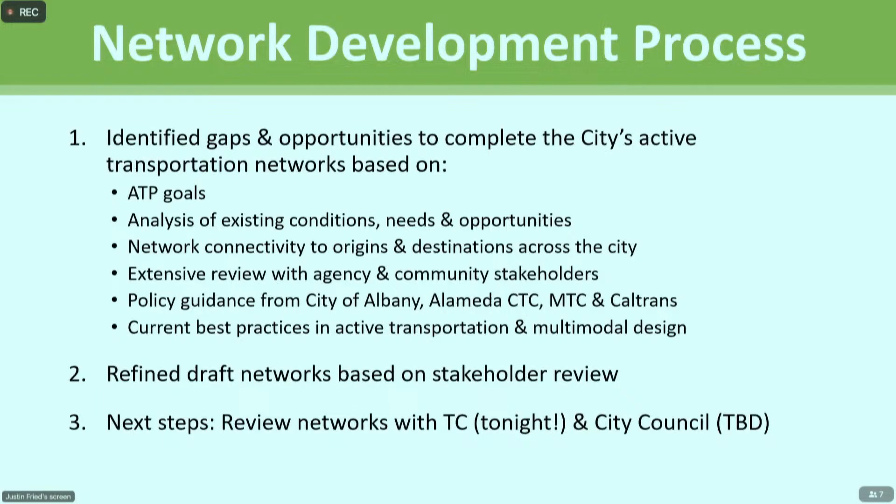I think I said more than I was intending to on that slide, but I felt like I needed to explain the big picture a little bit. So when we looked at the network development, these were some of the focus areas we really wanted to focus on, looking at the current active transportation plan and trying to take it to the next level.

So we want to improve the comfort level, and comfort's a word you're going to hear a lot. It's really a great way for us to measure the experience for biking and rolling, and for pedestrians and walking.

Specifically, we heard a lot of comments on the north-south streets, specifically the bike boulevards, some of those streets that we try to direct bikers to instead of streets like San Pablo. The east-west connections, so obviously north, south, east, west covers a lot. The school zones, especially the conflicts between pickup-dropoff with all the vehicles and then all the students trying to get there on bikes and walking. A lot of the major roadways, certainly there's a lot of conflict points, intersections especially.

One thing we really found was that the initial active transportation plan, not just in this city but all over, we've been doing this for about 15 years. In the beginning, we really focused a lot on segments, on lines and corridors, saying okay, we want to put bike lanes here, and that's great. In a lot of places we went ahead and did that. But the intersections are really where a lot of the conflict points remain, and they happen to be the most challenging too.

So what we really heard was, hey, the city's done a great job getting some of the lines down, but we still have to cross this street, and there's no way for me to cross it, even though the street is otherwise really good. But when I get to this intersection, the cross traffic doesn't stop, and what am I supposed to do? So we heard a lot of comments like that.

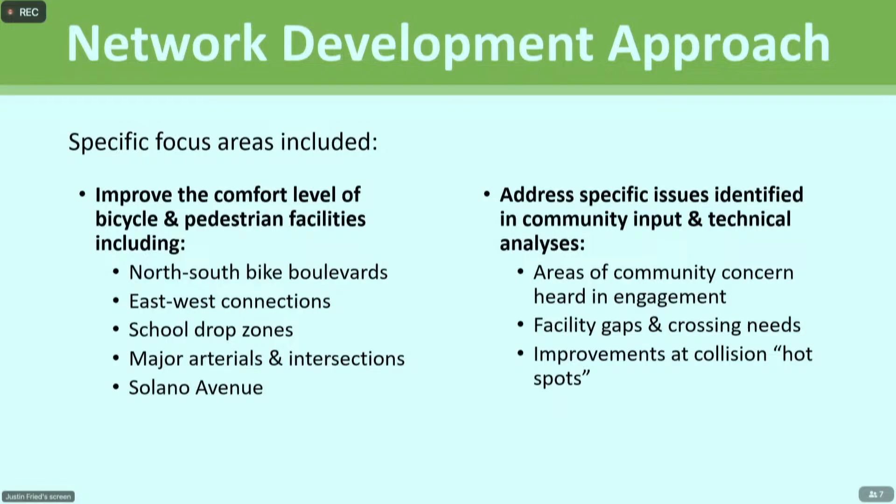What we're going to talk about here is more of the broader themes. Okay, next slide, I've got to keep moving here.

We put in the memo trying to keep it really simple and not get deep in the weeds. We want to walk through a little bit how the networks are structured here, and I'm going to turn it over to Angie to break it down a little more in terms of what it means and what those maps mean that were in your packet.

Okay, thanks Pete. Hi, I'm Angie Chan from Fehr & Peers. I'll be walking through the draft networks.

So the overall approach: we have our active transportation network, which is broken into our pedestrian and walking network, as well as our biking and rolling network.

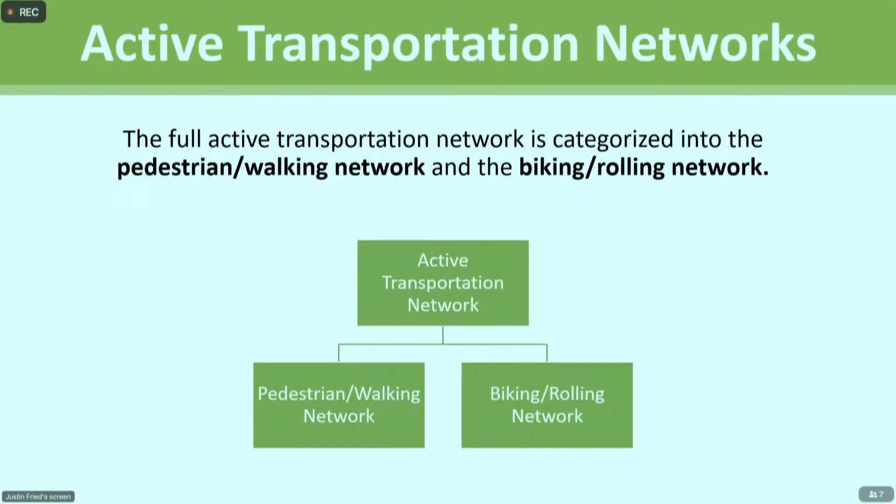So we developed this concept of nested networks for the ATP, and that helps us understand where to prioritize each mode. On the left-hand side, the pedestrian and walking network, the full network consists of all sidewalks, paths, and trails citywide. Pedestrians can walk anywhere there is a sidewalk or path, and that is the full mobility network for pedestrians.

Now within that, we have our high comfort walking network, where we have the highest levels of priority and treatment for people walking, and where we want to see the highest comfort. We want to make sure it's really, really safe and comfortable for people of all ages and abilities.

On the right-hand side, we have the same kind of concept for biking and rolling. You'll notice there's a designated biking and rolling network, but no equivalent for pedestrians, and that's because streets in Albany generally have sidewalks built out. Of course, there are issues with sidewalk obstructions, as well as places where the sidewalk width is not super ideal, but generally you can walk anywhere there is a street in Albany.

Whereas that's not the case for biking. Not every street in Albany has designated facilities, not every street is a bike route or a bike lane. So the designated network is everywhere there is a marked bike facility on the street. Now within the designated network, there's a priority or high comfort biking and rolling network, and this is where we want to get to the high comfort standard, all ages and abilities, which I'll talk about in the next few slides.

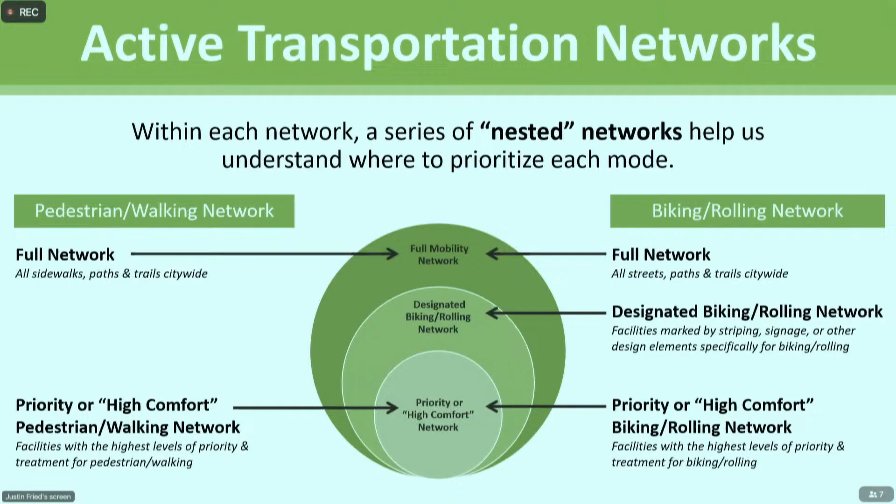So I know this body has talked about the concept of high comfort with the level of traffic stress, and recognizing that high comfort is kind of a subjective definition where some streets can be comfortable for some and not for others. But generally, there are treatments and standards that we can look to, to increase comfort for people walking.

And so we'll go over some of these treatments today. This is not an extensive list, but what we really want to focus on here, like Pete said, is crossings and conflict points, getting to a level of comfort at intersections, really separating pedestrians from potential conflicts with vehicles at these conflict points.

That can look like a curb extension, which reduces the crossing width for pedestrians, as well as treatments to improve visibility, such as an RRFB or a high visibility crosswalk to increase visibility for drivers, as well as median refuge islands to allow pedestrians a safe place to wait as they cross opposing lanes of travel.

There are also potential additional considerations that go into high comfort. Again, this is kind of more qualitative, things like sidewalk width, landscaping, lighting, other amenities that just make an overall attractive and comfortable pedestrian environment.

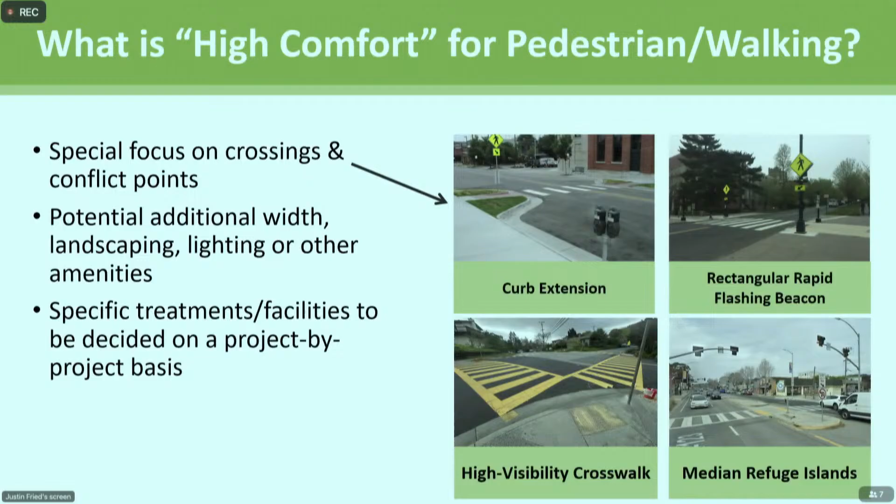Now for biking, there is a standard for high comfort defined by NACTO, all ages and abilities, and we would want to look to meet or exceed that. This is the new Urban Bikeway Design Guide, the new edition, which has this table for selecting all ages and abilities bikeways. I believe this commission has gone through some of this, but I'll walk through it again.

It's dependent on target motor vehicle speed as well as motor vehicle volume, both per day and also peak hour and peak direction. You'll notice on the top row that a protected bike lane is really acceptable as an all ages and abilities facility for streets with any vehicle speed and any vehicle volume. So that's a facility we can consider not just on our busiest streets, but on any street. But we also have other options.

We can have shared spaces, which is really targeted towards very low volume, very low speed streets, as well as bicycle boulevards, which are a little bit higher than that. And then we have advisory bike lanes, constrained bike lanes, as well as buffered bike lanes, which are acceptable for volumes under 3,000 for bike lanes, 6,000 for buffered bike lanes, as well as keeping speeds under 20 to 25.

We conducted traffic counts for this. The city does annual traffic counts, and we have a couple of new counts that informed our network development process. What we're seeing is that volumes are generally low on a lot of these corridors. There's still room for improvements with traffic calming and diversion, but speeds are generally a little higher than we'd want to see, higher than 25 miles an hour. We can get into that specific stuff later.

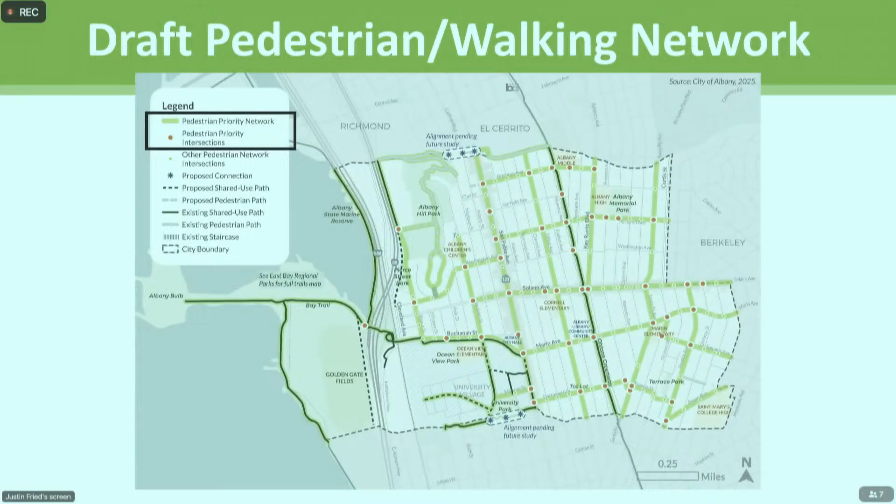Next slide. Now going into the draft biking and rolling network, this is also a place where we made some changes based on stakeholder feedback, which Pete will also go over when I hand it back to him.

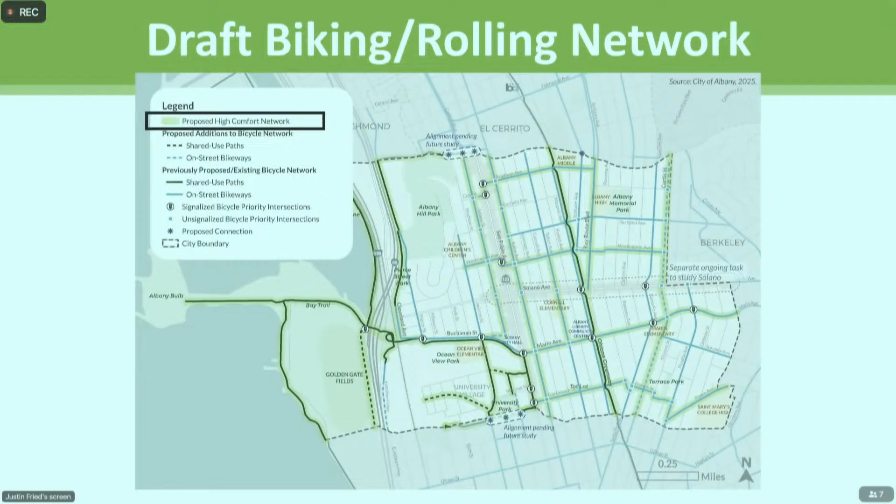Next slide. Okay, I'll bring it back to Pete.

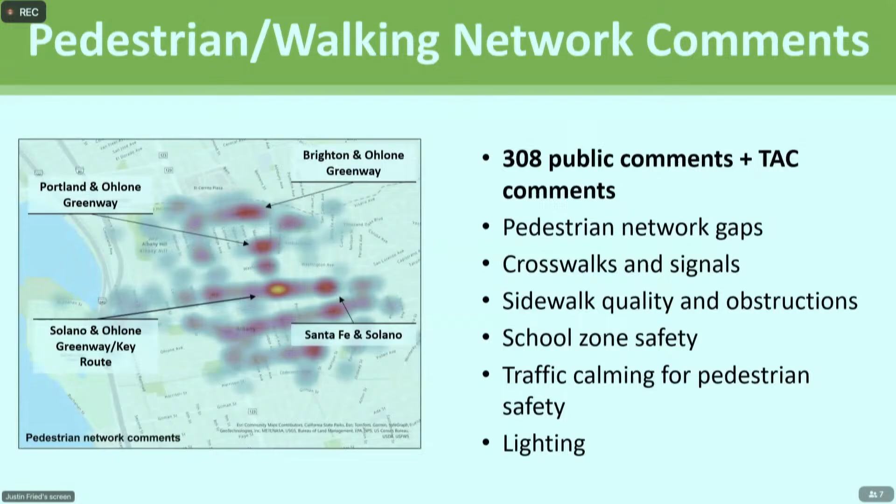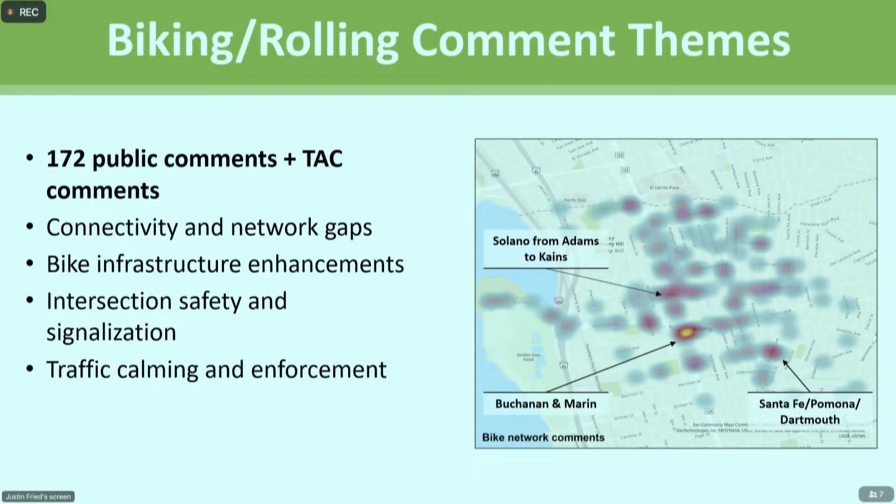Next slide. Again, Angie kind of walked through this — we assessed the feedback, we added some segments, we added some intersections. The comments were largely additive, which is a good thing. I don't think we really heard anybody say, oh, you've got to take that out. Usually most of the comments are additive. What that does is, in the end, create more improvements and more projects for the city, because every time we add a dot, that means we probably want a project there that contains a certain amount of improvements. And so that kicks the can down the road a bit, because then it becomes an issue of trying to prioritize these things.

If we just add more projects, it becomes kind of a wish list, and then we actually have to implement them. So in the third phase, we want to pull out the highest priority projects and define those a little more completely—design concepts, costs, and everything—so we can get them right into the city's CIP.

And then again, like I mentioned before, we got a lot of location-specific and facility-specific comments. We flagged all those, and they're in a mapped database, so when it comes time to look at a specific facility, we can draw a line around them and look at every comment we got about that.

Next slide. These are the items for further discussion—there are four of them. This isn't to say every other issue in the city is solved. As we go into the next phase, we'll look at some project-specific decisions, but here are some items about the network we wanted to tee up now and get your take on. For some of them we have a recommendation, but this is intended to be a discussion, and we want your input on these things too.

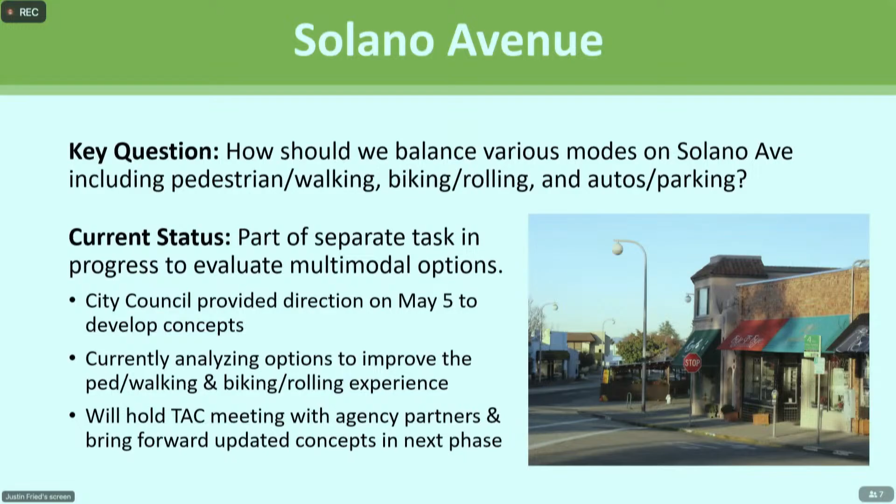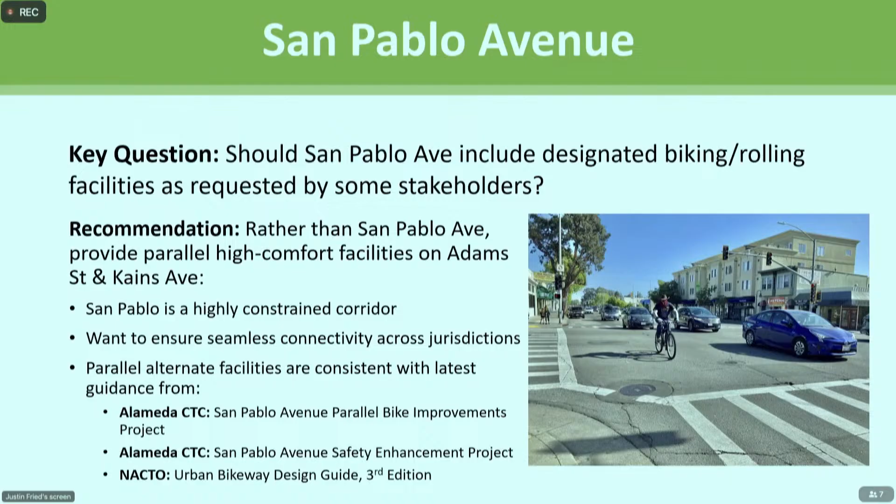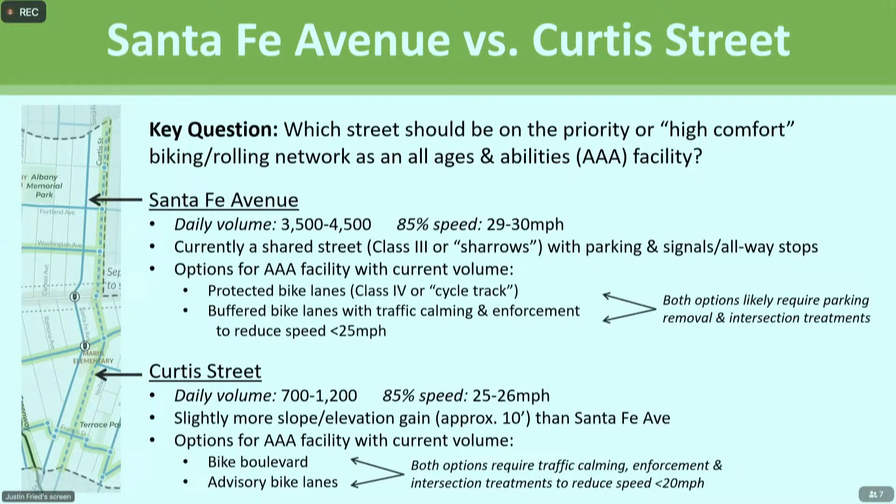So if we go to the next slide, I think we have some recommendations. For Santa Fe, it is a bikeway now, it's got the shared street sharrows, we would definitely recommend keeping it as such. It would be good to get the speeds down if we can. We heard a lot of comments about Santa Fe specifically, that it's kind of used as a cut through and it's kind of a speedway. So even if we weren't going to make it a fancy new bikeway, I think the recommendation definitely would be for traffic calming on Santa Fe, regardless of whether you do more things for bikes or not.

And then on Curtis, the recommendation is to develop that one as the all ages and abilities facility with either bike boulevard or advisory bike lanes. There's kind of two different types that could work there. That isn't necessarily something we have to decide now. When it's time to develop Curtis Street as an actual project, whether we take a close look at it at the end of this project or when it gets into the CIP and the city is able to do design and a lot of outreach just about that specific corridor, that's when we can make some of the decisions over which specific facility. But the fact that it's a shared facility and that we can achieve the all ages and abilities standard is kind of the key point.

Obviously there we would need to implement traffic calming and enforcement as part of that. And I definitely want to point out that traffic calming is not just an engineering solution, but also requires enforcement to try to get speeds below 20 miles an hour for a bike boulevard. And then again, as I mentioned, the intersection treatments. So there's no easy answer for some of these. There's obviously trade-offs in terms of cost and in terms of parking and speed and all those other things.

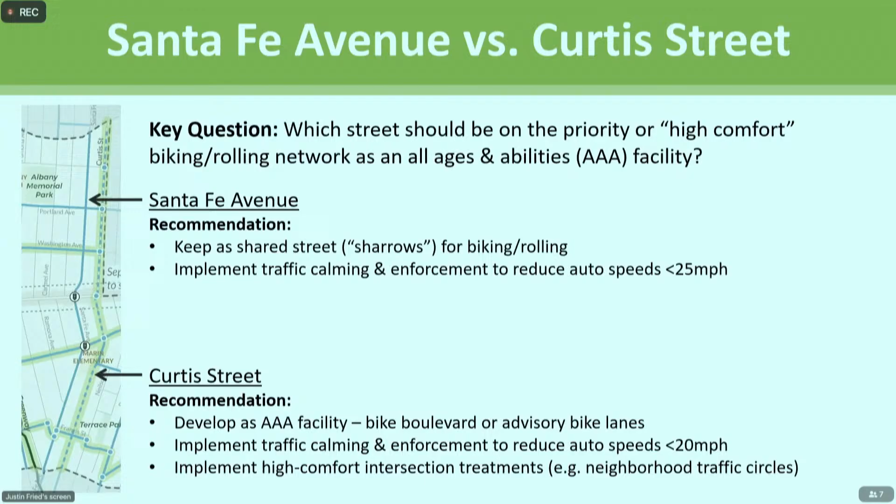But we definitely heard a demand for a north-south corridor in this part of the city, and definitely a lot of comments about Santa Fe being a little bit inhospitable for that. So that concludes this one, and there's only one more left. If there's no questions, we'll move on.

And connectivity is really important. What that really means, I guess, is being able to get to the places you want, but just in terms of developing a grid of lines and nodes that kind of reach every part of the city. And so in this part of the city, there's definitely a need for east-west connectivity.

Portland has slightly higher volumes, actually significantly higher volumes. It does have a school and a park right there, Albany High. And that's a tricky thing because the school and the park has a lot of active transportation demand. There's a lot of walkers and cyclists there, but that also creates a lot of auto demand for pickup and drop off at the school and for parking at the park. And so that kind of creates one of those streets where there's a lot of modes competing for a limited amount of space.

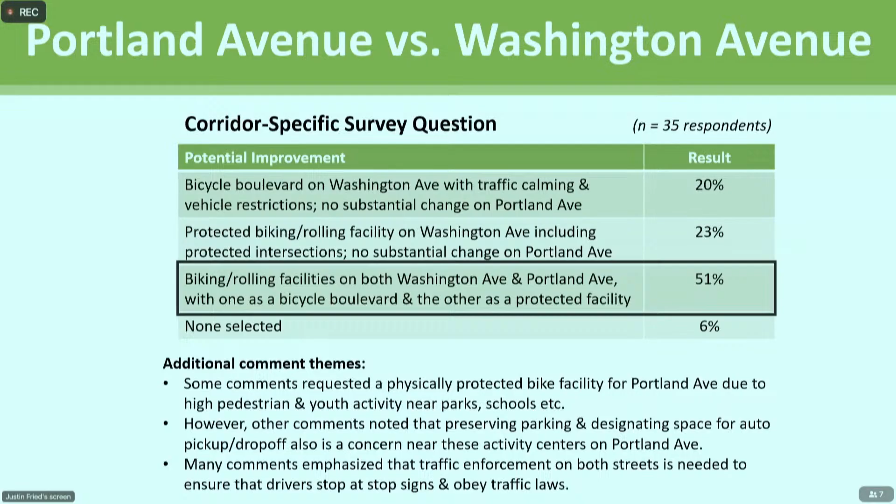Again, this is something we can discuss, and I think there's no perfect answer for it. But our recommendation, based on the information we've got so far, is to include Portland in the network as a bike boulevard, but not on the high comfort network. And it's right on the line there.

There is the all ages and abilities standard, but NACTO also has kind of a base standard for these things. It qualifies as a bike boulevard if it's got less than 3,000 cars, and they make the distinction that if it's got less than 2,000 and really low speeds, it could even be an all ages and abilities bike boulevard. That may seem like a wonky distinction, but when you're sharing a lane with cars and they're bearing down right behind you, the busier that street is, the more stress that causes. Because it's right on the line, and because we want to maximize what we can do, we felt it would be good as a bike boulevard with traffic calming and enforcement to get those speeds down.

Over on Washington, we were thinking that might be the better priority for the AAA facility, also as a bike boulevard. We went through lots of different options, but really to focus on high comfort treatments, traffic calming and enforcement. The volumes are right on the line, so we're thinking about the potential for some traffic diversion to get those volumes lower. But we know that can be somewhat controversial and cause spillover traffic effects. So this is probably the thorniest issue we have, in that there's no clear winner. But these are some of the recommendations we've gotten to so far at the staff level.

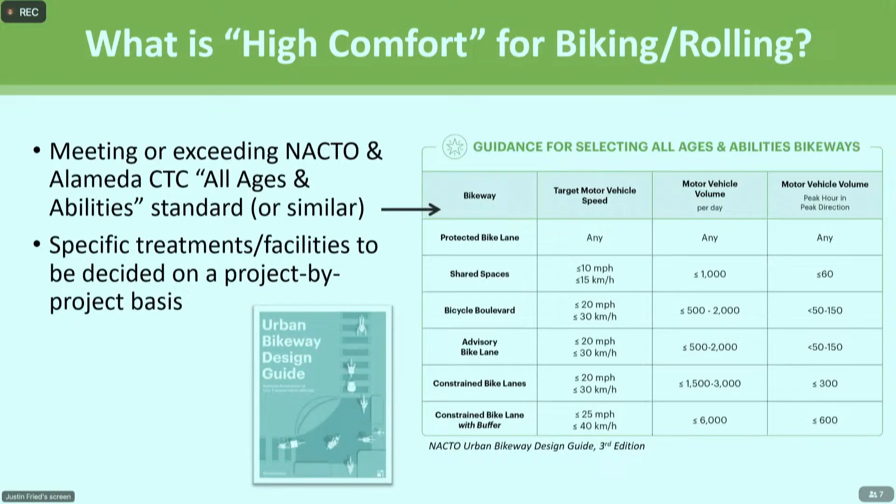But where we do have that, we used it. But again, it's a guideline. That was a really long answer to your question. I appreciate it, yeah, thanks.

I don't know the best way to ask it, but if Portland would be considered a bike boulevard, but not a high comfort bike boulevard, compared to how it is currently, would anything actually change infrastructure-wise?

That's a great question, and there's no specific answer to that. Bike Boulevard can have a number of different features, and it really depends on how the city wants to design them. I kind of see it from a transit perspective, like BRT, bus rapid transit, which is a word that means something, but then when you actually implement it, it kind of starts to get watered down a little bit and say, oh, this is a bike boulevard, and maybe it doesn't feel like that to folks. So some of the key items are obviously having slow speeds and low volumes. Those are the two things we talked about.

Intersections are really important, and there's a couple different options. When you're crossing any type of street, one great idea for a bike boulevard is to remove all the stop signs in the bike boulevard direction and have all the cross streets be the ones that stop. You can also do neighborhood traffic circles, little ones in there. They can also act as deflectors for speed that actually slow down cars as well.

There's a wide array of things. Earlier today I was meeting with the team, and we were talking about trying to develop standards for what a high comfort bike boulevard in the City of Albany looks like versus a regular bike boulevard. We want to make sure we have guidelines, but that we're not too prescriptive, because you can paint yourself into a corner, saying everything with a green line has to have this, this, this, and this, and then find out at the project level that something doesn't work. But we do want guidelines of what that could mean. So that was a long answer - I guess we're not quite there yet in terms of the specific difference, but we want it to be at a higher level, like a full bike boulevard with all the bells and whistles.

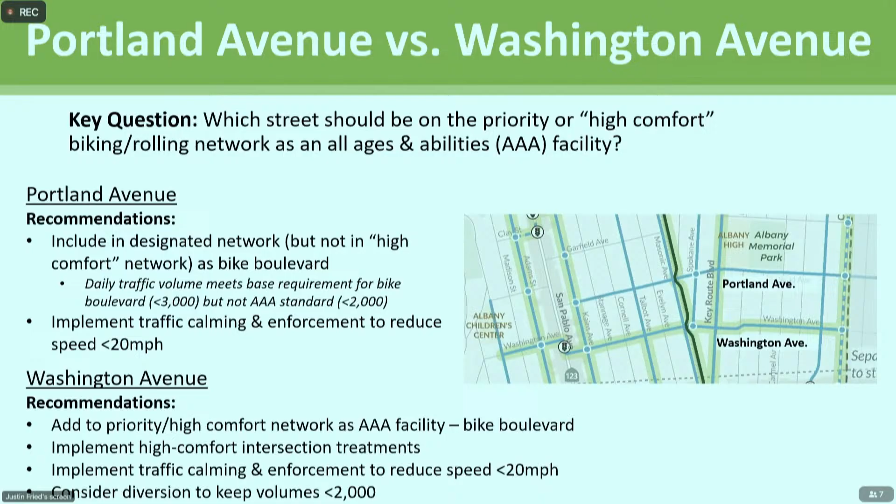That's a really good question, and I think we'll need to dig more into that. Any other questions? I think that's all we have, and I'll turn it back over to the team to talk about next steps.

Can we go back to one of the network maps? Doesn't matter initially.

On the walking network, down at the bottom in the Codornices Creek corridor, there appears to be something there - didn't know there was anything going on there. Could you talk about that, staff or consultants? Similar to what I mentioned in the north and south, we have the Jackson path project coming to connect from Buchanan down to Monroe through University Village. We have vision for that to continue south, and there's some thoughts on exactly where that connects, but we don't know the exact alignment until UC makes decisions on the property to the south.

So it's more a north-south connection rather than east-west? Okay, so that might change to a north-south set of asterisks? Yes, that's a great idea. Cool, we see now that it's not clear what that means.

We were kind of buried in it for a long time. We had several different symbols, and we finally said okay, we'll do the stars with the blob, add some directional. Well, you've used three asterisks - you could exchange two of those for different symbols. Lucky charms, yeah.

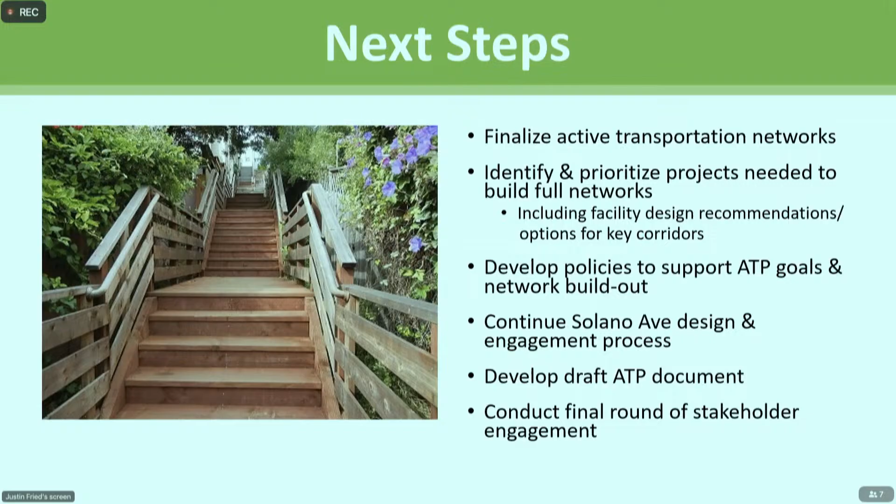So where we go from here - we've got finalizing the active transportation network. Once we receive feedback from this commission and bring these final networks to the city council, we will be finalizing the networks and officially moving on to phase 3 of the ATP: identifying and prioritizing projects. This is part of phase 3 where we're going to determine which projects should come first to close the major gaps in the city's bike and pedestrian networks. The step will include facility design recommendations and/or options for key corridors throughout the city.

We'll be developing supportive policies as part of phase 3, developing city policies that complement the ATP goals and help facilitate the network's build out. We'll also be talking more about Solano Avenue in phase 3, continuing design development and public engagement there, and developing the draft active transportation plan, which we'll solicit feedback on. All of those pieces of phase 3 will involve public and stakeholder feedback, such as yourselves.

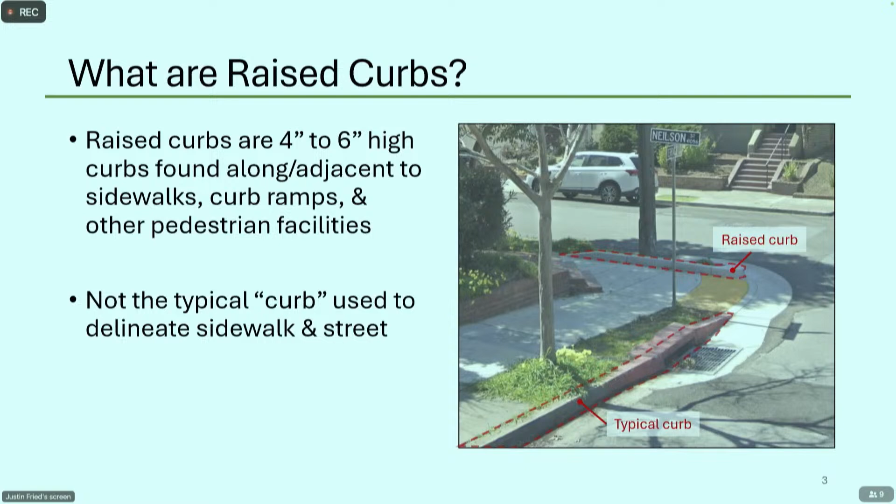They're generally 4-inch to 6-inch high, and they are found around curb ramps or for other types of protective measures. So the raised curbs are becoming more prevalent, especially in our limited right-of-ways, and the need is expected to increase.

Some of the reasons this is happening: as we hear tonight, we're trying to squeeze more and more facilities into the same right-of-way - bikeways, other transportation elements - and there are times when we need to separate them. There's increased canopy desires, and so some of these are coming around potentially building out, widening sidewalks, things like that, and we may need to adjust curb lines or otherwise create spaces.

Stormwater facilities is probably the largest one we're anticipating to see, because the green infrastructure installation is going to require quite a bit of real estate. In order to make sure that the drop-offs, which can be significant in order to capture the amount of stormwater infrastructure we need and minimize parking impacts, requires fairly deep basins.

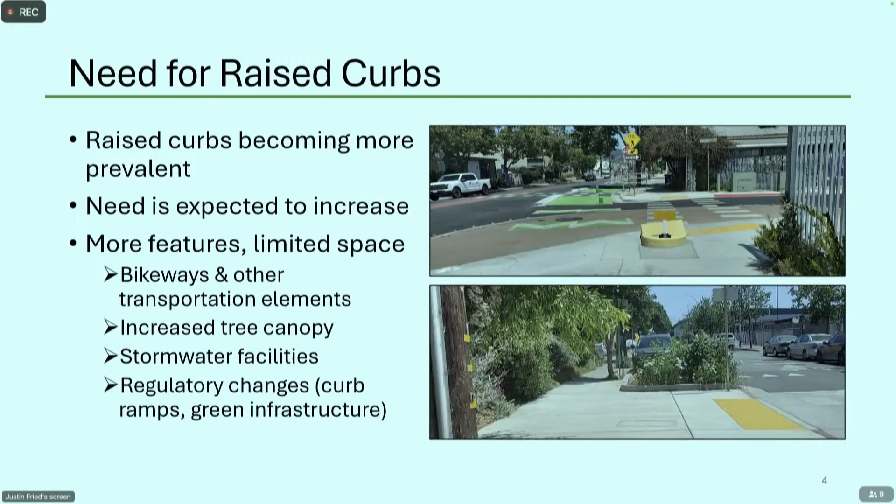It is a requirement of both California Building Code, which applies to right-of-way, and ADA requirements and regulations that there be some kind of edge protection. That can be things such as the raised curb you see here. It can also be railings. Those are two example options.

Additional requirements are because of vertical grade changes that we are unable to, usually because of right-of-way constraints, spread out enough to separate. Drainage control is a major one that we need to consider. City of Albany does not have storm drainage infrastructure in a wide array of streets around town.

Green infrastructure, as I mentioned earlier. Retaining of soil - this happens a lot at the back end of sidewalks, at private property, kind of retaining structures, whether it be short curbs or larger retaining structures. Traffic control and pedestrian safety. Accessibility benefits and accessibility requirements. And often there's a maintenance consideration, because a raised curb can often take quite a bit more traffic impacts before requiring maintenance to address, versus a railing of some sort.

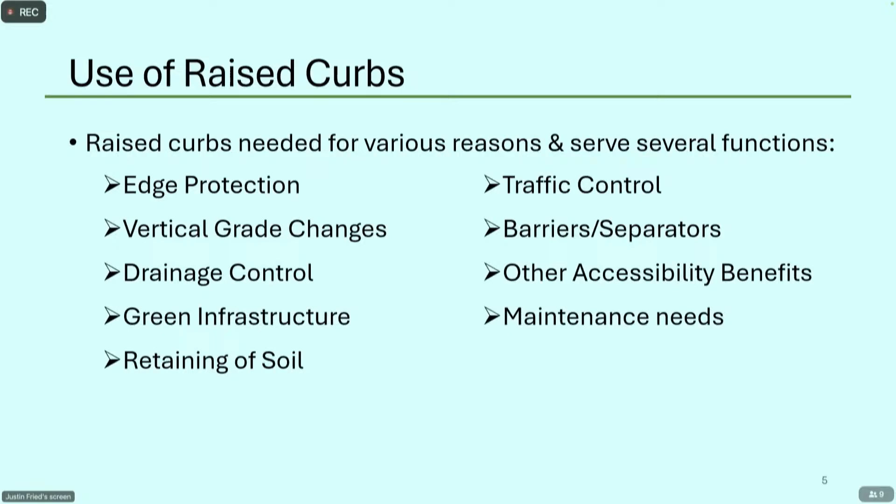So here's some examples of regulations that include the use of raised curbs in certain situations. I mentioned PROWAG, California Building Code - all have certain requirements at various elevation changes in which these raised curbs or alternatives are installed.

One thing to bring up about the PROWAG changes, and also California Building Code, as well as desires expressed by the Commission, is for directional curb ramps. Although PROWAG does not require directional curb ramps - it just requires one curb ramp at each direction of travel, which can be angled separately than the direction of travel - that means in our limited right-of-way, we're taking a much wider sweep around our intersections, and we are addressing a more significant need to manage where our pedestrian access route is.

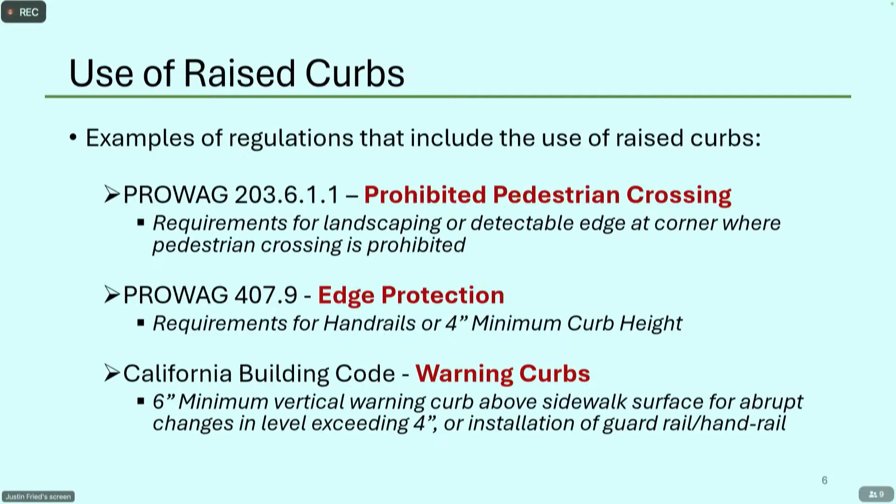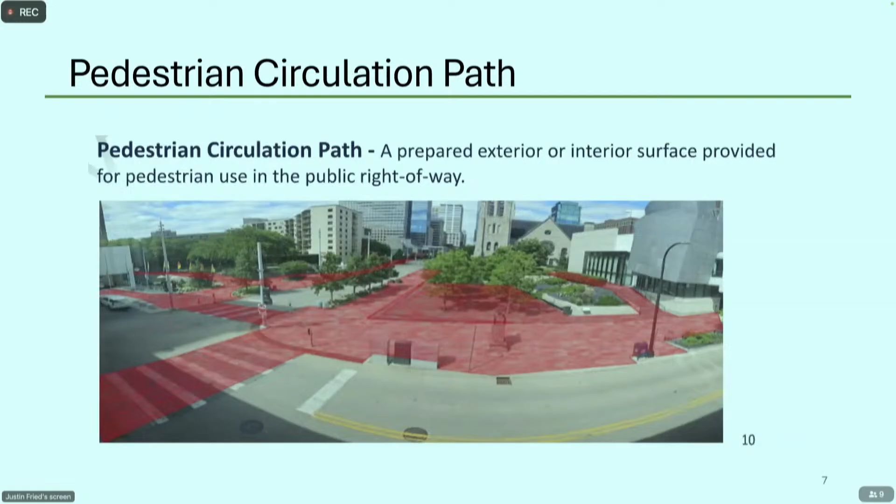Speaking of pedestrian access route, it's probably a good chance also to cover background in terms of ADA on the differences between a pedestrian circulation path, which is essentially all the places we expect pedestrians to potentially stand, congregate in, access, other than, say, a landscaping strip or a bench or something like that, versus a pedestrian access route.

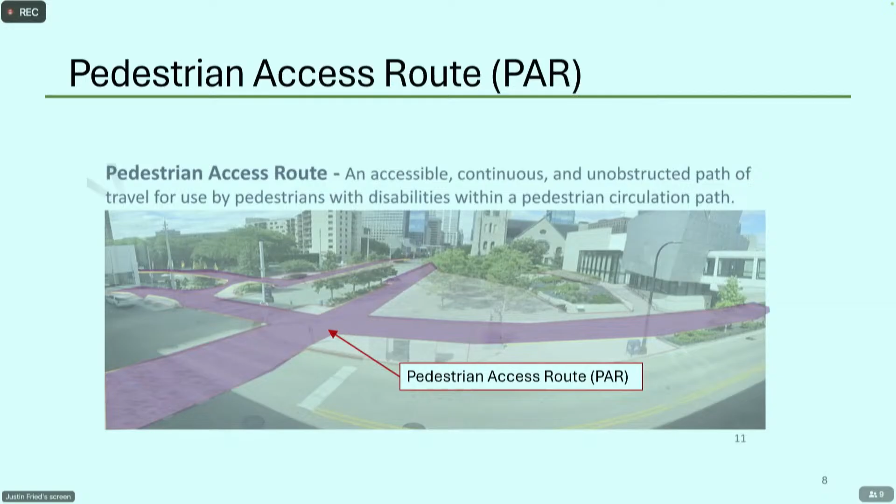Pedestrian access route is regulated by PROWAG. It's an accessible, continuous, and unobstructed path of travel. And we have landscape areas.

Now, this is our textbook ideal of what these would look like. So we have a frontage zone. This is the zone that is immediately next to buildings or properties. In City of Albany, these wide open spaces where there's plenty of room to create gradual changes that allow continuous access to all zones looks more like that. Our frontage zones are often 1 foot, our furniture zone are often 18 inches, and our pedestrian access route is maybe on average 5 feet wide at most.

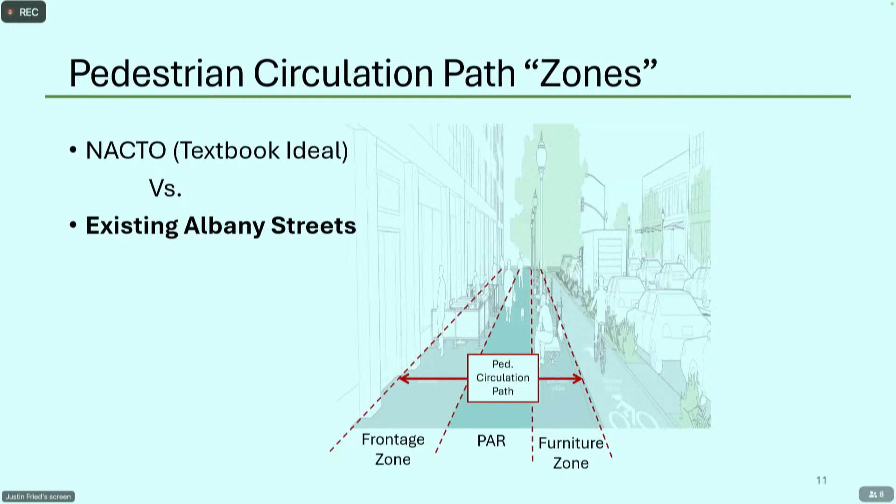And so we're looking at far less room to make our grade changes, necessitating raised curbs. I will say, just to make it clear, we do not try to put raised curbs in. Our ideal situation is to use a landscape strip to control and demonstrate a detectable way that there is no crossing, or to say this is a detectable method of saying you are leaving the pedestrian access route. However, there are situations where it is unavoidable, which I'll cover a little bit.

To kind of zoom out a little bit, there really is no one-size-fits-all approach to how curbs are managed, where landscapes fit, and part of the reason we have design guidelines for curb ramps is to be able to start creating a standardization and consistency across the city on how we approach things. What's very familiar now may not be what's there later, but the more we can make people feel like my intersection is similar to other intersections, the more we can protect people and make sure that they understand where the pedestrian access path is, or the pedestrian access route is.

With that, going into all the different times we evaluate to try to avoid raised curbs and where they may need to be entertained. So we start with our curb ramp city standard details and curb ramp design guidelines. This is what we provide for designers for them to start. And we have refinements during design, as our curb ramp design guidelines indicate where we can't accommodate or achieve the goals of the guidelines. We will be coming back to Transportation Commission to discuss and consider some site-specific constraints.

Adjustments based on field conditions during construction also occur. And this is where I think having a mutual understanding of what we're looking for when it comes to places where, due to construction issues, we may find that it's unavoidable to install a raised curb following our conversations at this Transportation Commission and at City Council.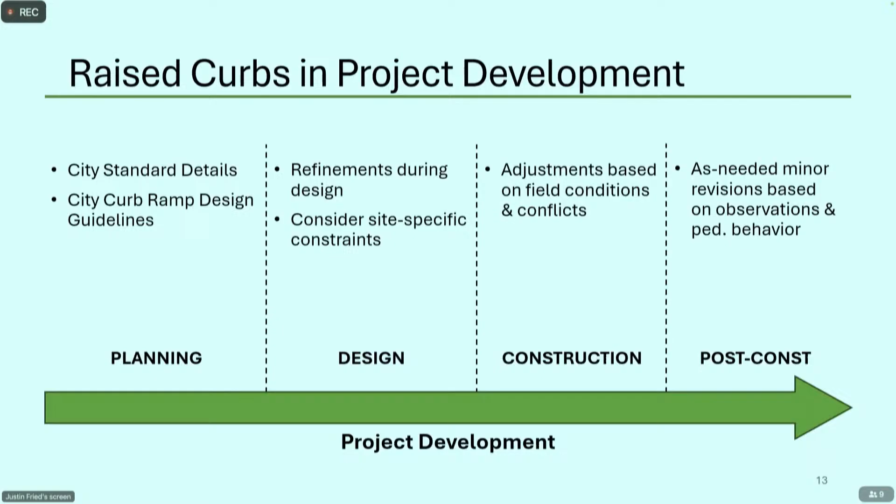For a raised curb, maybe that means, if a curb that doesn't need paint, maybe we want to consider it because we've seen how people are using that street once it's installed.

So we really need to balance the big picture, again, our risks, costs, and our maintenance needs. And so making sure that what we put out there can be maintained long-term is very important, especially when it comes to accessibility, because the time it takes to take out a barricade is a time where somebody could unexpectedly try to cross the street. But it has to be balanced also against the cost. So there's a continual evaluation and evolution on these in each situation.

So when we're doing projects, we want to consider impacts of pedestrian behavior and where they're located, how they're used, where they're located both in space in terms of our sidewalk zones, but also maybe how they're used, commercial zones versus a residential street. We also want to think about how long we need the pedestrian behavior changes to be highlighted. So there may be short-term cones versus long-term closures.

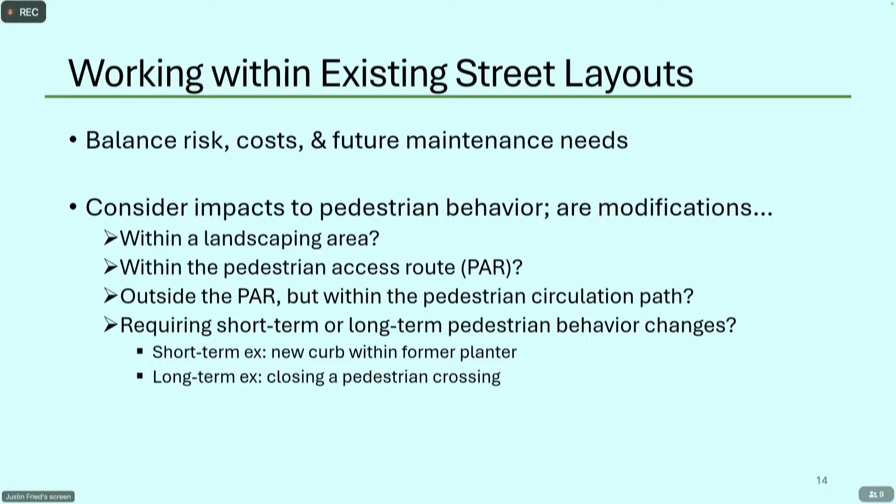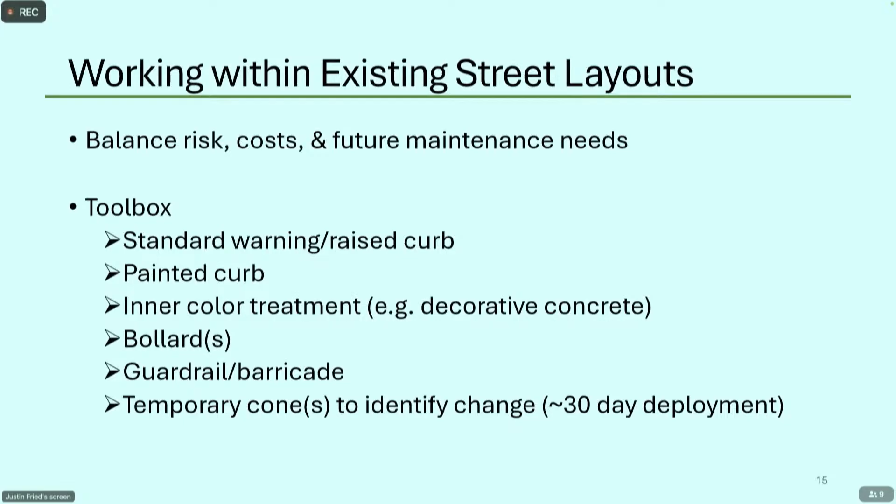In terms of our toolbox, there's no prioritization here, it's just a list. We have standard warning raised curbs—unpainted, what a contractor would put out without any other notes. There's also painted curbs, which can include color treatments such as decorative concrete, bollards, guardrails, barricades, and temporary cones to identify changes. This might be where we want people to get familiar with it, but long-term we don't think it needs ongoing maintenance of paint.

This is the approach we're taking for comment tonight, going back to pedestrian access routes versus changes or encroachments into pedestrian access routes, using that as a delineation. Outside of pedestrian access routes, this would be in landscape, non-traversable areas, or traversable areas. Traversable areas may be a widening of a sidewalk where there isn't a planter strip, but the larger furniture zone delineates an alignment of where the pedestrian access route would be.

In those cases, it ranges from maybe just a standard curb treatment to something more visible with colored concrete or potentially paint as we get into commercial and high pedestrian corridors. As we get into more impacts to our pedestrian access routes, where we have constrictions requiring vertical elements, we look at using bollards, signposts, or street furnishings—another option that's often used—again considering increasing effort and visibility in commercial and high pedestrian corridors.

Finally, the most challenging for pedestrian behavior is closures of crossings, because people want to cross where they want to cross, and changing behavior is complicated. In those cases, we probably want a much more significant barrier to make it very clear about crossings.

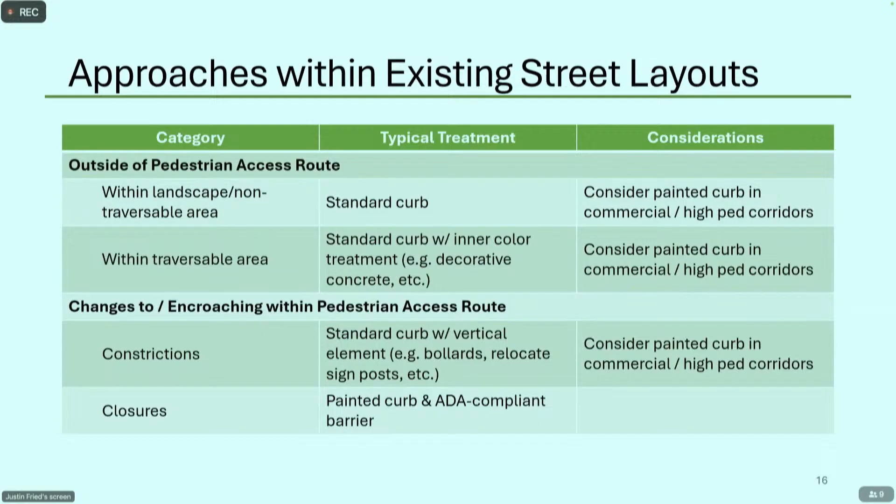Some recent raised curbs in City of Albany projects: we have Neilson and Terrace, where we had to rebuild a curb ramp due to a stormwater project. In that case, it's outside of the pedestrian access route, and we installed a raised curb fully outside because there was no way to build an ADA compliant crossing across the street. There is another crossing on the other side, so that would serve.

One key clarification I want to talk about, which I did not include here, is what a crossing is. By vehicle code, a crossing is any extension of a pedestrian route on a block. So even if there's no crosswalk, that is technically still considered a crossing unless we close it.

On 8th Street, this is a bioretention basin installed on the Codornices Creek Phase 4 trail project. This is a planter that was installed within the furniture zone, and it's serving well—people are following the pedestrian access route. It is narrow here, but clearly defined. In Marin Masonic, this bioretention basin was installed consistent with the planter strip along Marin Avenue.

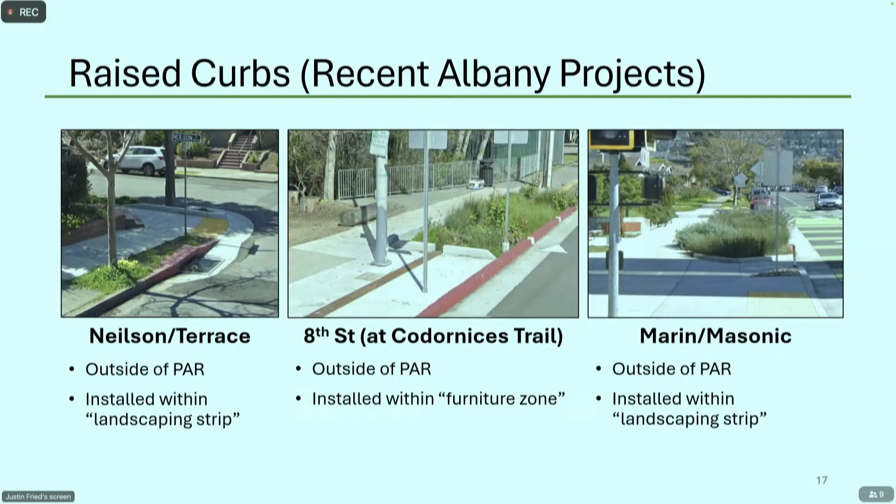Some more recent local examples of other situations that occur: this is in El Cerrito, at Key and... I'm not sure about the cross street, but this intersection used to have a crossing directly across the street. During some project work, they had to close that crossing. In this case, they have a painted curb and barricade, because there's need for more intensive behavior change to make sure people are crossing at a safe location.

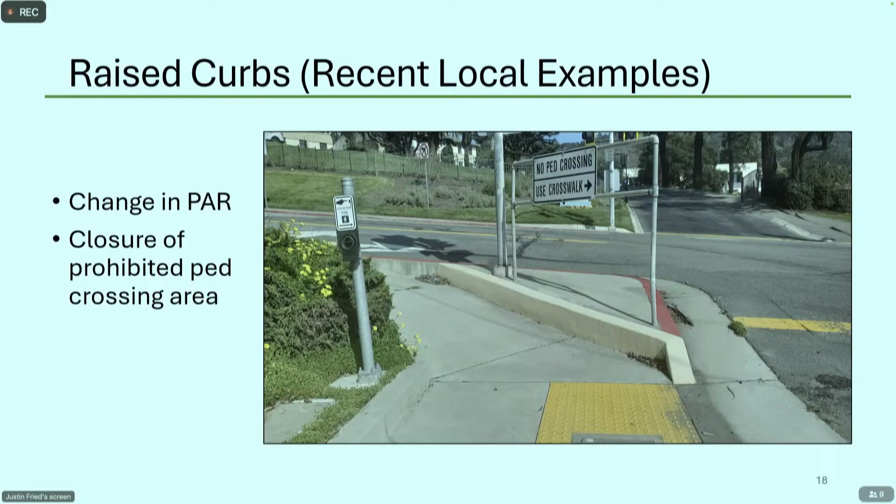This is along San Pablo Avenue in El Cerrito, at the El Cerrito del Norte Plaza. Around it is some of the development work and ongoing street work, so this is a change in the pedestrian access route. Theoretically, I don't think people were crossing here safely anyway, but you can see to the right that they are planning on putting in some kind of crossing on the very right-hand side. This is in construction, so what we're seeing is likely not the final configuration.

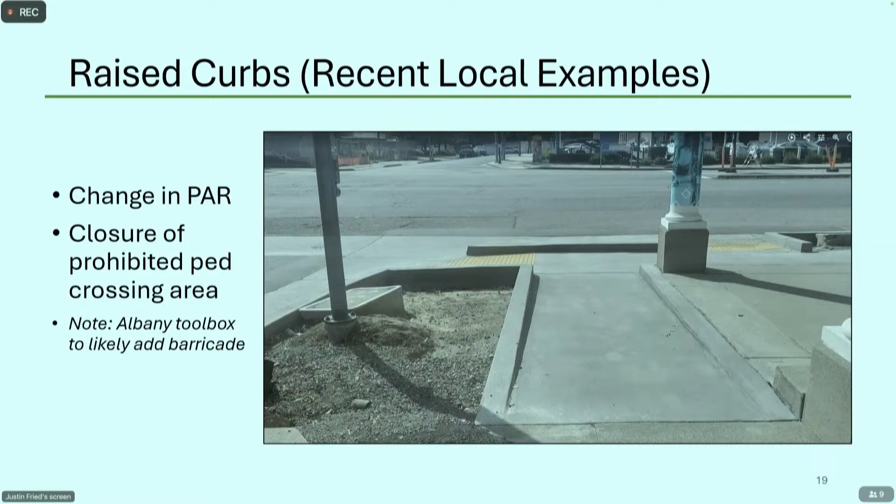With that, I open it up for questions and general comments about what I presented—any questions, and just general conversation. Great, appreciate the presentation.

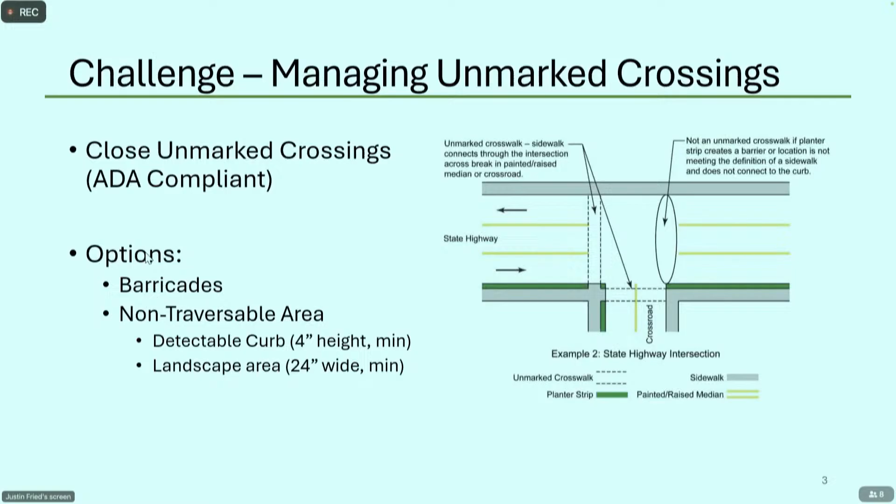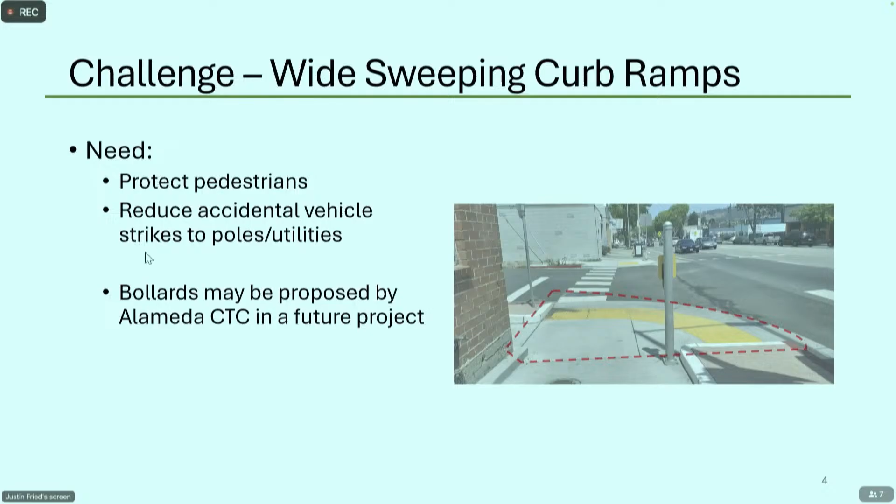We also have some wide sweeping curb ramps here, so there's a need to protect pedestrians and reduce accidental vehicle strikes to poles and utilities. One idea being evaluated under an upcoming Alameda CTC project coordinating with Caltrans is whether bollards may be proposed. Comments about that would also be appreciated, since we'll be communicating with them.

There's another challenge, which is some very steep slopes at the garage with some sidewalk warping, which often leads to rolled ankles and other kinds of pedestrian injuries.

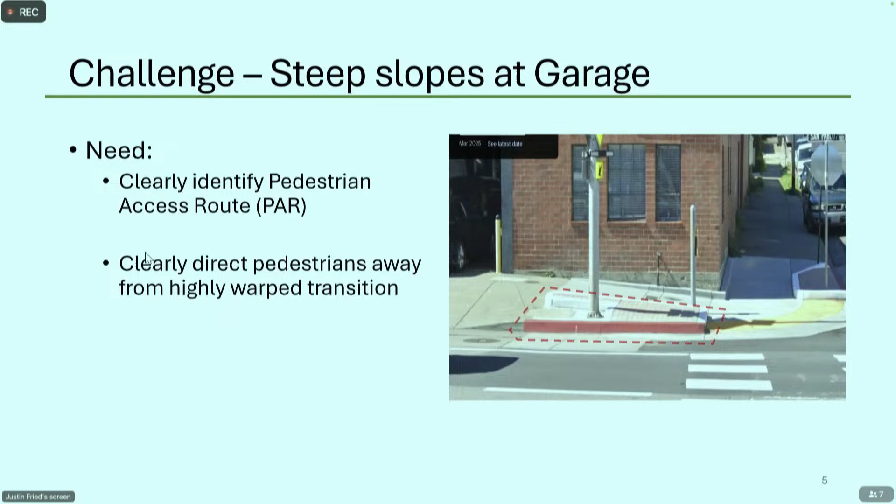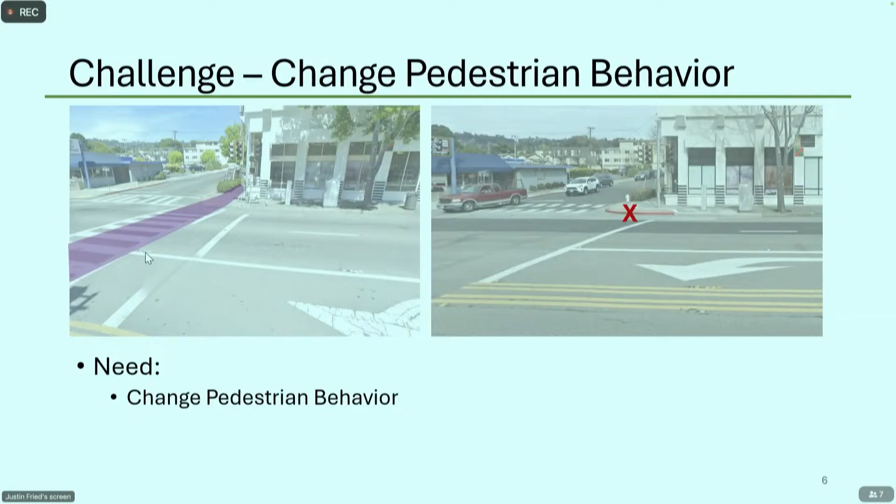We needed to change pedestrian behavior at Brighton Avenue. This is the old crosswalk on the left, and we have relocated the crossing to the north side of the intersection.

The building entrances, we briefly touched on this in the last presentation. One thing to note is while the raised curb with the railing is within the larger pedestrian access route down the corridor, the raised curb on the street side is within the larger furniture zone area and is consistent with the alignment of the non-pedestrian route throughout this block.

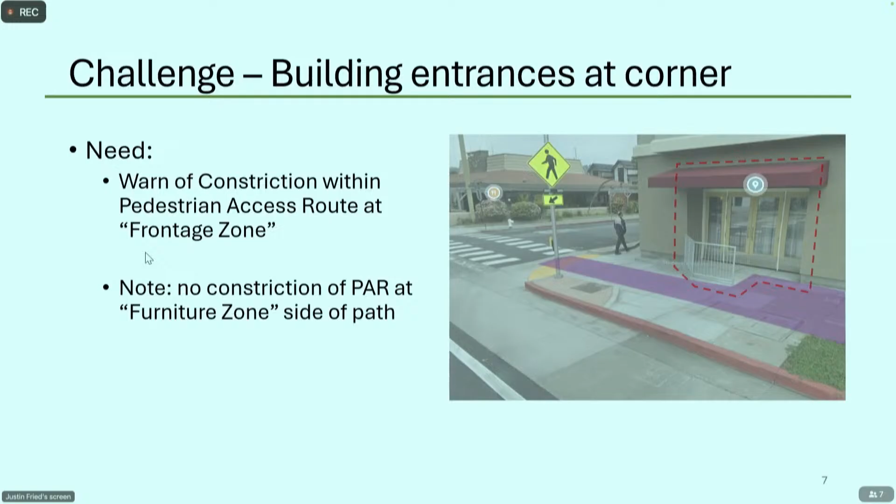Another challenge, which is often less discussed although it has come up quite a bit on this project, is the fact that we have no storm drain on this corridor, and Washington, Portland, and San Pablo are all major overland flow channels.

We have issues with landscaping washing out throughout town where large amounts of water flow, and San Pablo Avenue specifically has a lot of debris that catches in planting areas and leads to significant maintenance, but luckily also a lot of community support for cleaning up San Pablo. I see the Blue Glove group out almost every day when I'm out there.

So long-term, on the storm drain front, curb ramps really cannot be expected to control this amount of flow, and we'd need a storm drain system in order for this to no longer be the kind of challenge we're discussing tonight.

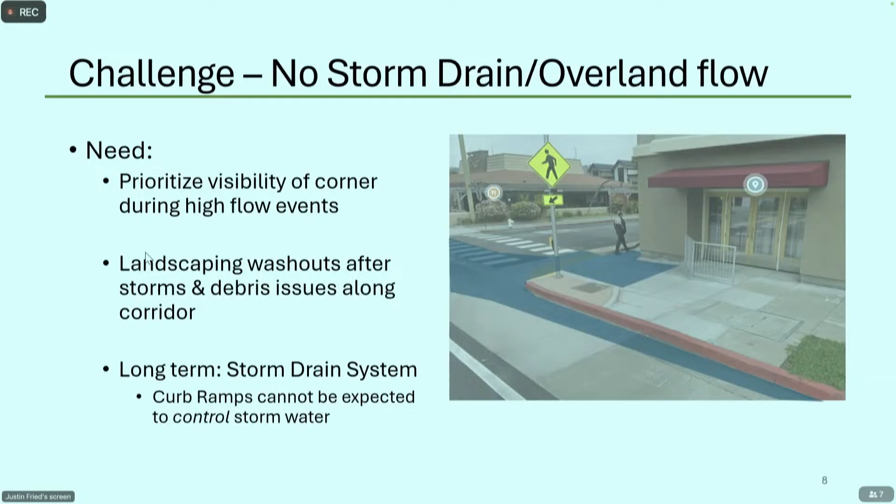Other challenges - this is Castro. This was actually, coincidentally, 2 days ago where we lost our first barricade. This is an area where this ramp was constructed before we identified the need to close pedestrian crossings on the project, so we put up a barricade to meet the minimum we needed to do. But as you can see, within 8 months of installation, we've already lost it.

Other challenges are inconsistent furniture zones on blocks. San Pablo Avenue was developed in a much more piecemeal fashion than other parts of Albany - it's a much older street. There are significant utility conflicts at corners, meaning in some cases we were unable to relocate utility boxes, and there's coordination across multiple projects - three different projects on San Pablo Avenue in the same corridor area at the same time in 2024. We needed to close the project out.

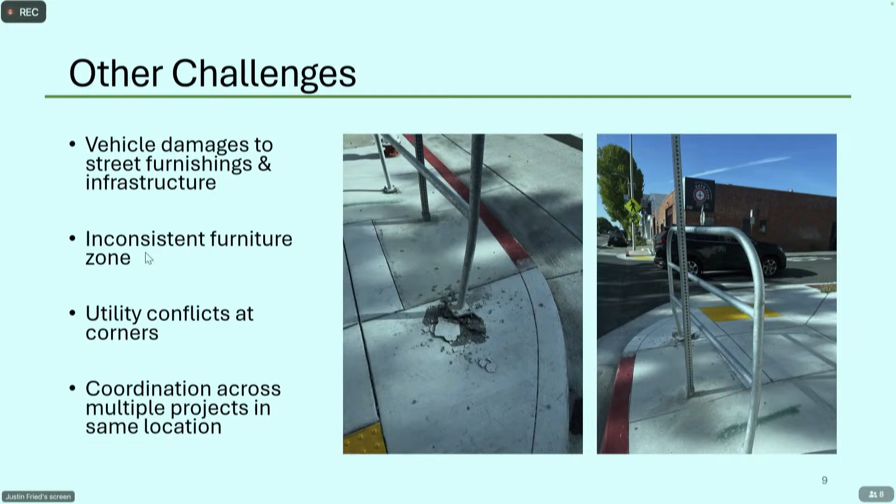At this point, we are looking at some refinements before we close. We needed to close the contract out, but we're looking at refinements before we close the CIP project to make sure the final resolution is something we're all happy with. With that said, some of the refinements - I'll briefly list them, then talk about each one individually.

We are looking at lowering the northwest Castro corner - this is the corner with the barricade that was just damaged. We're looking at improvements to closing the north leg crossing, which is where the barricade was damaged, and we're looking at adding concrete valley gutters. They were included in projects in other locations, but not at this particular location.

Generally, we're looking at painting all of the raised curbs. This is a commercial corridor with a lot of pedestrian traffic, as discussed. We're trimming back or adding barricades on curbs that extend into the pedestrian access route, repairing minor damages from the new project work, and improving visibility of pedestrian safety islands. These islands are getting run over quite a bit, and we've lost a lot of our traffic signage there, so we want things that are more durable and can take a few hits.

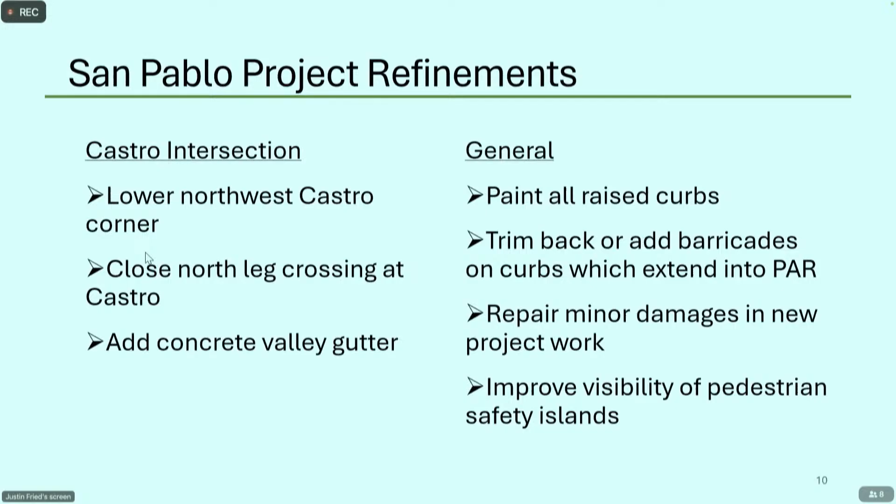This applies both down from Castro and the approaches on the north and south sidewalk area. So lowering the curb ramp is expected to allow us to improve the valley gutter to curb ramp crossing, or crosswalk transition, for a smoother vehicle turn. We're seeing a lot of damage to the existing pavement at that location from cars bottoming out, scraping, and other things like that.

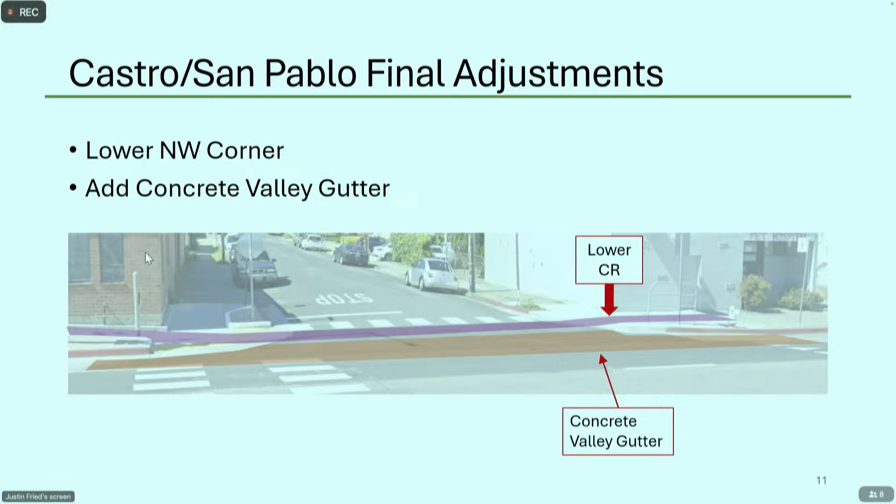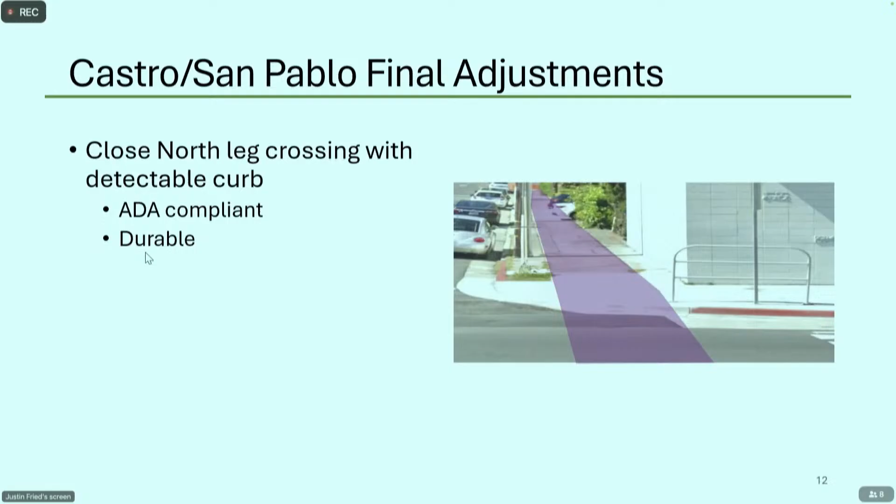We want to close the North leg crossing formally. This is showing where that pedestrian access route would be even with the barricades, pushed as far in as I could comfortably put in, hoping that nobody would run it over. It got run over, and it does not cover the pedestrian access route at all.

And we want to paint all raised curbs white, to contrast with what's out there with the stamped red concrete.

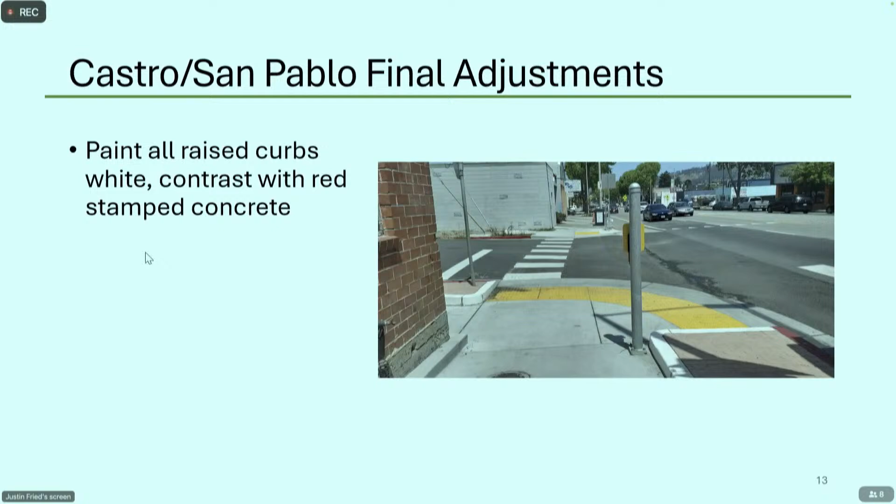Specifically for the Castro San Pablo final adjustments at the raised curbs, where there was a report of somebody tripping, that is a location where we extended it a little too far. It was not aligned with the pedestrian access route in the back, so we do want to trim that back. When the trip happened, this is a photo from that report from Brian Martin.

As you can see, the curb was not painted white. It has since been painted white, and I think there's significantly more visibility here now. But comments tonight, if there's recommendations from this commission or comments about increasing the visibility, we are happy to hear and look at ways to incorporate.

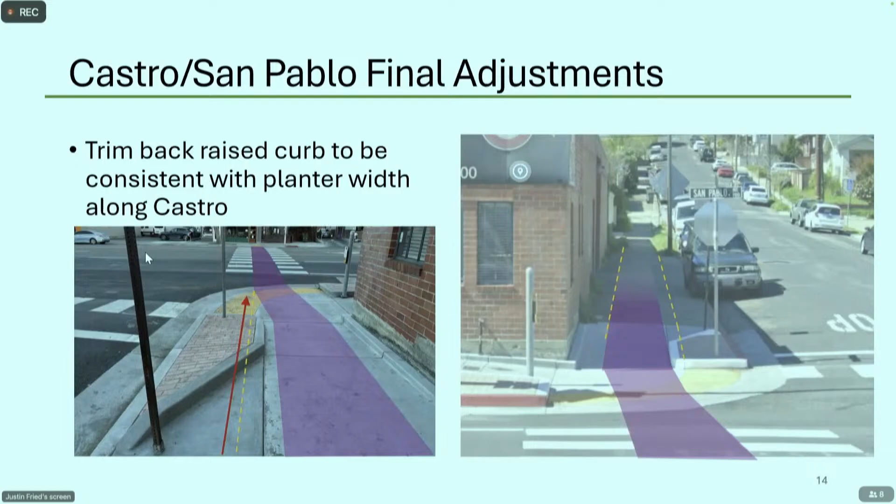And finally, metal barricades at the southeast corner of—I'm sorry, this is not Castro and San Pablo, this is Brighton and San Pablo. This is where we had the crossing closure. This is a location where we are still seeing pedestrian behavior where they step over and try to cross even now. So we really want to make sure this is fully closed with a barricade and a sign saying to direct pedestrians to the north leg of the intersection.

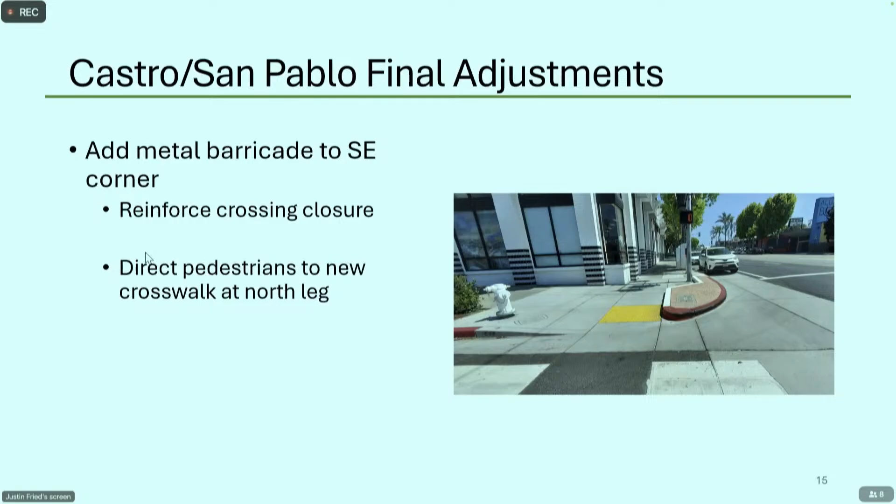Finally, these are more kind of avoiding major ongoing maintenance issues. This is what that corner currently looks like. You can see there used to be some signage at the very corner. People have run over it multiple times. We lose cones.

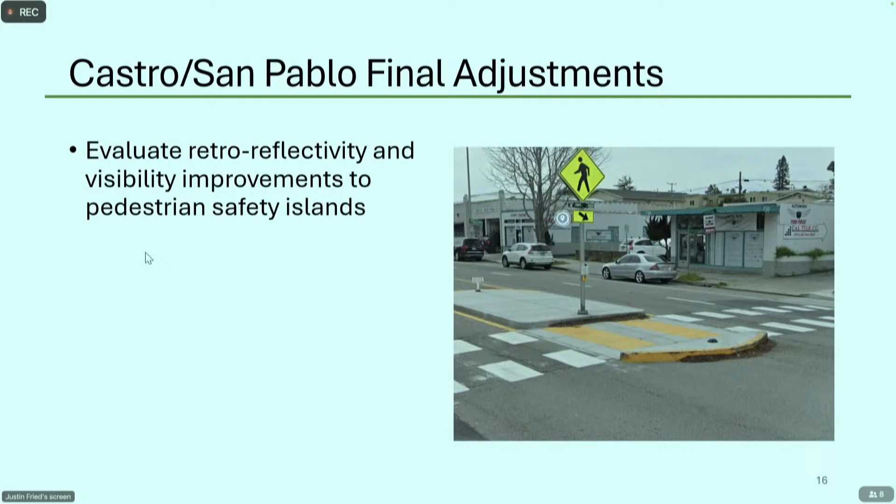Clearly, pedestrian improvements are needed, but we also want to make that corner a little bit clearer. The protected crossing a little clearer, so that vehicles don't continue to run over it. So, with that, questions and comments.

Any questions from the commission? No questions? Any public questions or comments? Sorry, I do have a question.

This might be totally infeasible, so I guess that's what I'm asking about. Similar to Masonic and Marin with the bioretention basin there being like a kind of landscaped permanent barrier, is anything like that feasible in the intersections where you're wanting to put a more permanent barrier?

So I think under this project or this capital improvement project, likely no. We're trying to still work within our remaining project contingency in delivering any kind of refinements. However, we have claimed the space, so to say, in a little way, potentially. I will say that these are very narrow, even still. And bioretention basins, especially in Albany and some of the flatter areas, need storm drainage to underdrain to make sure there's not kind of vector control issues. So it may be a future kind of thing versus a now thing.